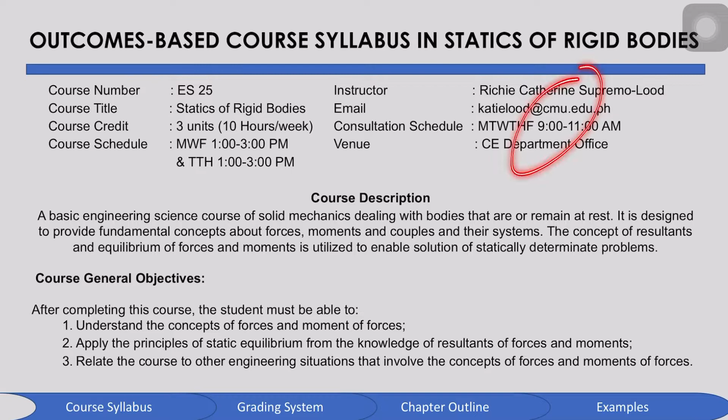Okay, so this is Vector Mechanics for Engineers, Statics. So this is the course syllabus for this course. So we have the course number. So for this mid-year, we have 3 units, so 10 hours per week kay ang nakaschedule sa to is 2 hours per day. Then we have consultation, and actually you can contact me through Messenger anytime if may mga queries.

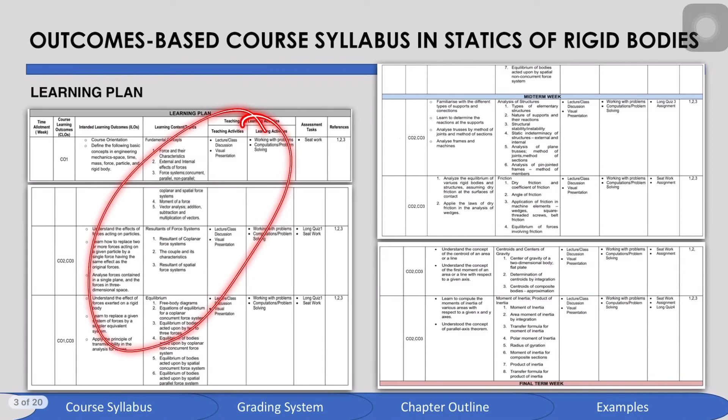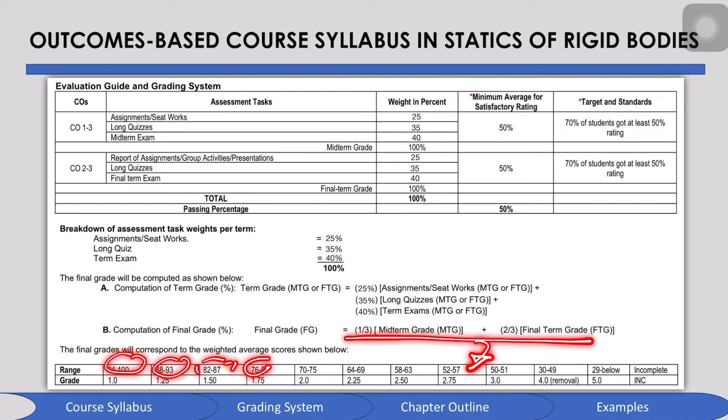So we have here chapter 1, what is mechanics, defined as the science which describes and predicts conditions of rest or motion of bodies under the action of forces. So whatever forces nga imong gi-subject sa imong body, imuha na siyang ma-define through this mechanics. So makita nimo imo siyang ma-describe unsa siya pag-move or ma-predict nimo ang iyang condition, kung move ba siya, kung ma-remain ba siya at rest, wala ba siya motion under the forces nga imong gi-subject.

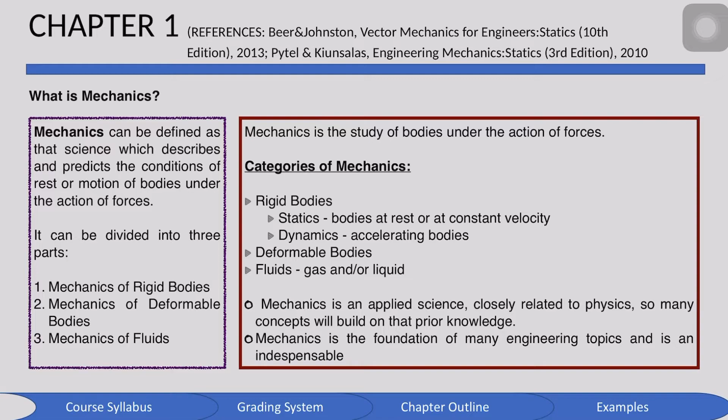So it is divided into 3 parts. We have rigid bodies, deformable bodies, and fluids. So sa rigid bodies naa tay duha, we have statics and dynamics. So karon sa atong subject diri, bodies at rest or at constant velocity. So mechanics is closely related to physics. So many concepts will build on that prior knowledge. So kung unsa to imong nahibaloan sa physics, applicable na siya diri sa atong i-discuss. Mechanics is also the foundation of many engineering topics.

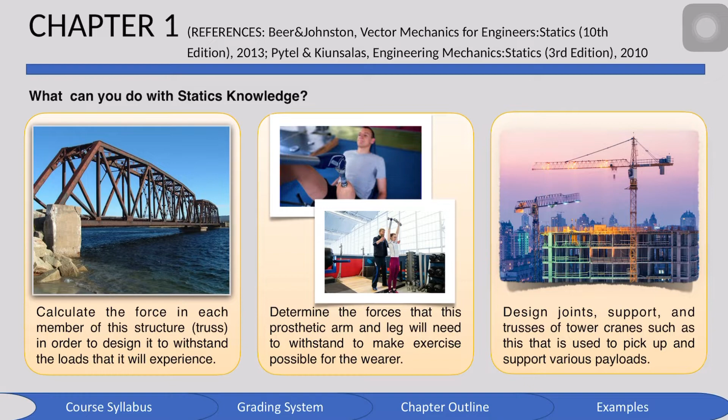Second, with the use of statics, we can determine forces that this prosthetic arm and leg will need to withstand to make exercise possible for the wearer. So pwede na siya makompute pod. Design joints, supports, and trusses of tower cranes such as this one, that is used to pick up and support various payloads. So, pwede na ma-design iyang joints, kung sa iyang support, pila ang force nga exert sa cable nga nag-support ani. So, pwede na siya i-compute with our knowledge of statics.

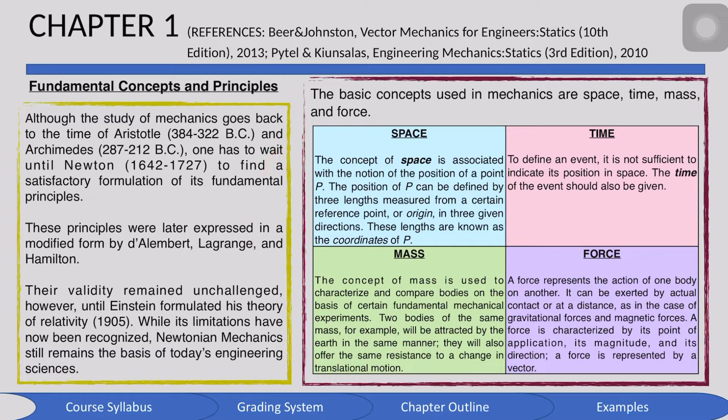So, these are the fundamental concepts and principles. Okay, so basahon ninyo. So we have space, time, mass, and force. Then we have parallelogram law for addition of forces. That forces acting on a particle may be replaced by a single force called the resultant force, obtained by drawing the diagonal of the parallelogram which has sides equal to the given forces. So kani siya will be applicable later. So muna siya actually ang application, to replace by a single force katong mga forces nga nag-act on a particle. You can use the parallelogram law. Imbis nga duha siya ka force, you can replace it by a single force.

The principle of transmissibility states that the condition of equilibrium or motion of a rigid body will remain unchanged if a force acting at a given point of a rigid body is replaced by a force of the same magnitude and the same direction, but acting at a different point, provided that the two forces have the same line of action. So, say for example, naa kay object, naa kay force nga i-apply. Through principle of transmissibility, pwede nimo siya i-transfer at any given point along this line of action, kung asa ang agianan sa imong force. So, pwede nimo siya ibutang diri nga point sa imong object. Equivalent na siya. So, mao na siya principle of transmissibility.

Then we have three fundamental laws of Newton, formulated by Sir Isaac Newton in the latter part of the 17th century. So, we have first, second, and third law. First law, if the resultant force acting on a particle is zero, then the particle is in equilibrium, or stated mathematically as this one.

We have summation of forces is equal to 0. So, summation of forces, or the vector sum or the resultant of all the forces na nag-act on that particle, dapat equal siya sa 0. Or, we can say that it is in equilibrium. Second law, acceleration of a particle is proportional to the resultant force acting on it. So, proportional daw ang acceleration on the resultant force. Or we have summation of forces equals mass times acceleration, or diba force is mass times acceleration.

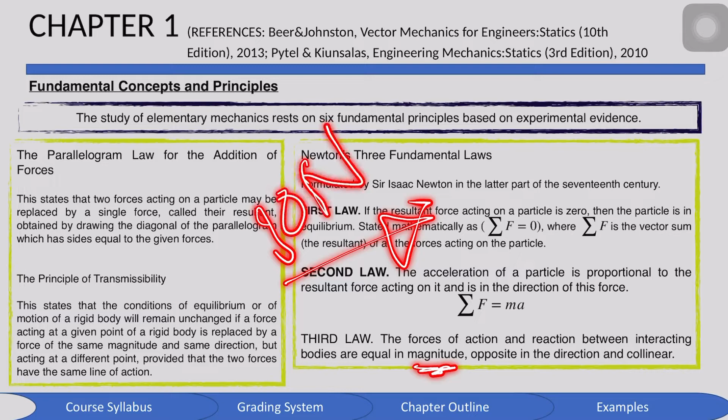Third law, forces of action and reaction between interacting bodies are equal in magnitude, opposite in direction, and collinear. So kung naay force nga gi-exert, naa pud siya equivalent reaction force, which is equal in magnitude. So kung nag-exert ka og 10 newtons, ang reaction equivalent po siya sa 10 newtons, pero opposite ilahang direction, but they are collinear, or naa sila sa same line of action.

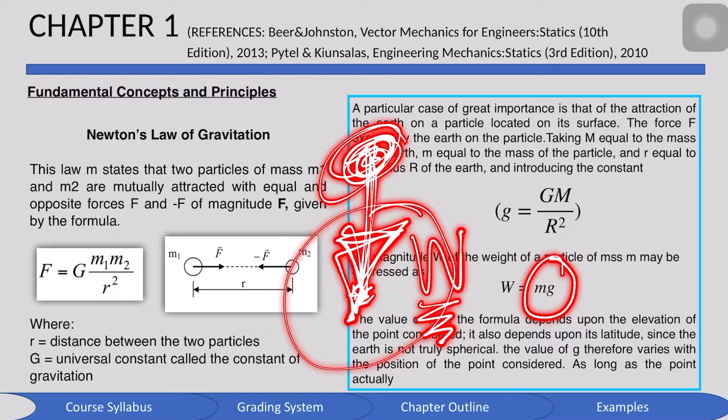Then, naa tay constant dayon nga value nga g, where g is equal to 9.81 meter per second squared, constant of gravitation. Magnitude W, or the weight of the particle, so kung naa sa Earth ang particle, naa siyay corresponding weight, or kani siya is the force of attraction of that particle towards the Earth, which is equivalent to weight nga mass times gravitational constant nga 9.81 meter per second squared.

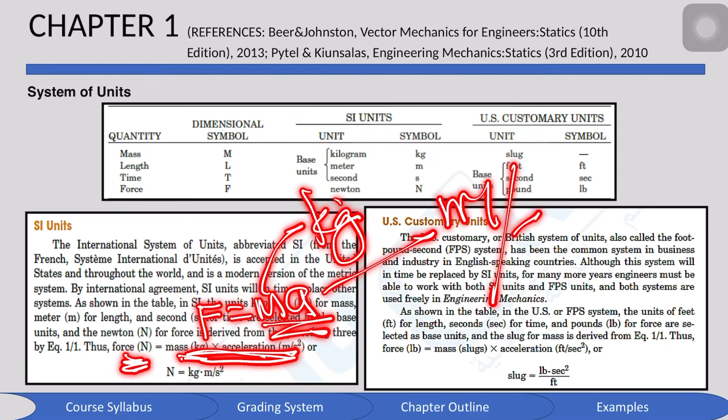System of units, we have SI units, and then we have US customary units. So for SI, International System of Units, abbreviated SI. Unit, kilogram for mass, meter for length, seconds for time, tapos Newton for force. So these are the basic units. But force N is derived from multiplying mass times acceleration, mass in kilograms, acceleration meter per second squared. So, naa dayon equivalent value nga newtons.

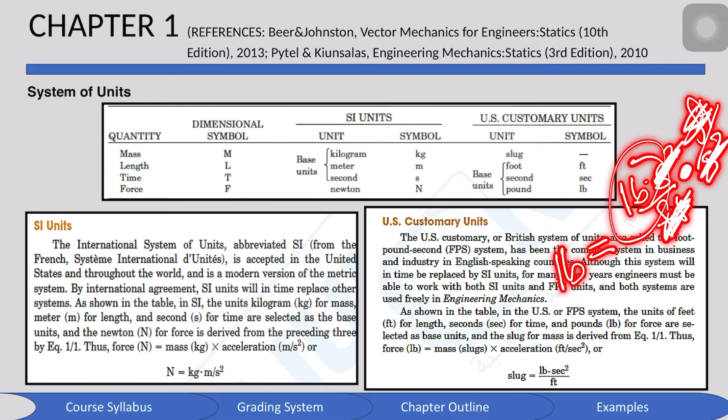For US customary units, force in pounds, mass in slug, acceleration feet per second squared. So, pounds is equal to mass nga slug, pound second squared over feet, times acceleration nga feet per second squared. So, mag-cancel out na. Okay, 3 of the kinetic units referred to as the basic units may be defined arbitrarily. The fourth unit, referred to as a derived unit, must have a definition compatible with Newton's second law, which is force is equal to mass times acceleration.